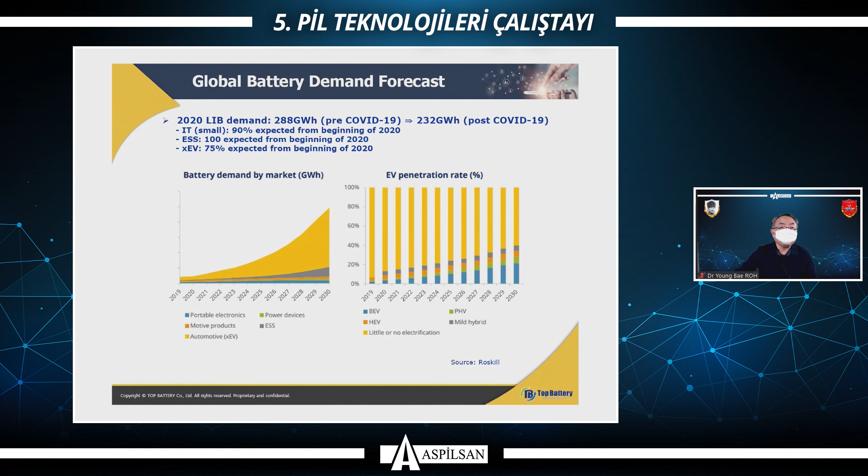The major battery players are developing high energy density batteries by using high nickel concentration cathode material. LG Chemical, Samsung SDI, SK Innovation, altogether are increasing their batteries' EV driving distance using high concentration nickel cathode material like NCM, NCA, NCMA material. So we have to keep an eye on high nickel cathode material.

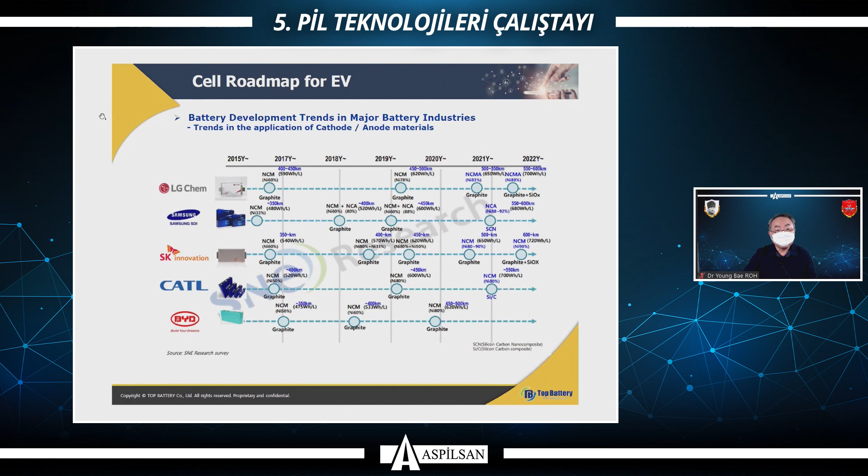Major cell makers are fiercely competing to secure high nickel cathode material by long-term contracts with CAM material suppliers due to concerns about the shortage of high nickel cathode material. But high nickel material makers say that high nickel materials have a higher technological entry barrier, and need several years for formal factory operations due to safety concerns and complicated process control.

So China companies initially focused on LFP material, highlighting the low sale price. But they are also shifting to NCM material to realize high capacity batteries.

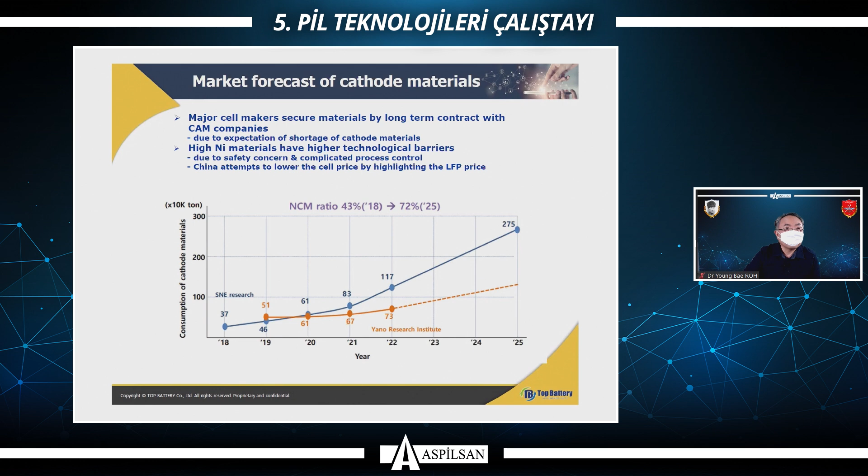As for cathode material development trends, two kinds of material will be listed in terms of cost effectiveness. One is high capacity material development, over 200 milliampere-hour per gram, including high nickel concentration over 80%, like NCM, NCA, NCMA. Another is high voltage material development with 4.7 average voltage, cobalt-free, like LNMO.

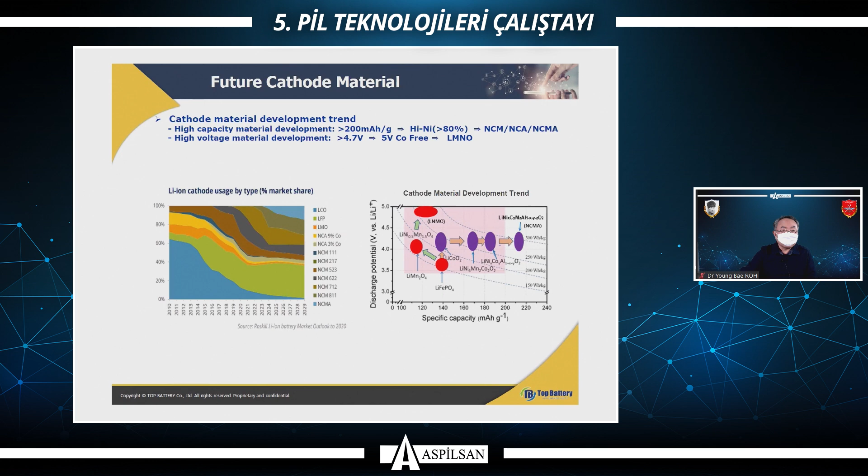From the next slide, I want to explain in more detail how to develop this kind of material. To develop future cathode material, there are several main factors like doping, facet control of crystal structure, size tailoring, and morphology control.

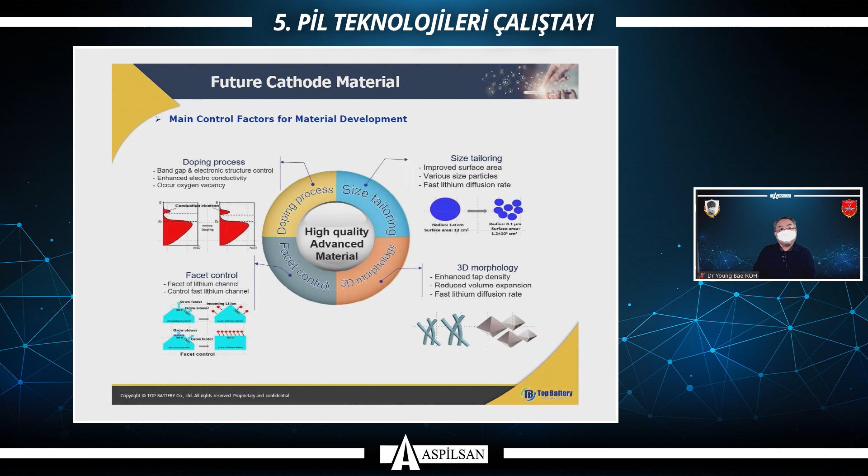There are several cathode material development strategies. Doping is one of the popular strategies to control band gap and electronic structure and improve structural stability and thermal stability. It needs enhanced ion and electron transport. Surface coating is composed of a barrier layer to protect active material from electrolyte and prevent electrolyte decomposition. It leads to stabilizing the surface reaction with the electrolyte.

Through morphology and crystal structure control, we have to select preferred particle orientations, easy to release internal crystalline strain, and optimize the crystal structure and facet control for fast lithium-ion channels. Tailoring crystal and particle size is a crucial factor to facilitate the lithium-ion diffusion rate.

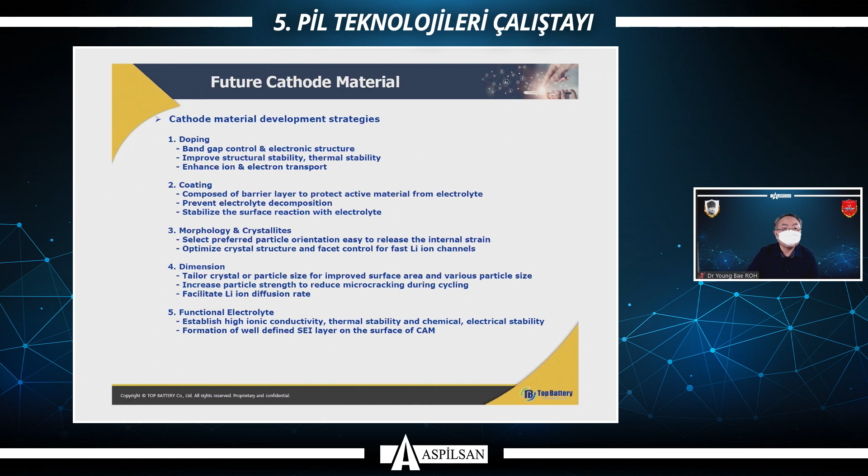These are the representative high nickel cathode materials. Polycrystalline cathode particle is composed of a secondary particle with smaller primary particles combined together. But the single crystal cathode particle only consists of a larger primary particle.

N is nickel, C is cobalt, M is manganese. 5:3:2, 6:2:2, 8:1:1 means the molar ratio. The more nickel concentration, the larger cell capacity is realized. Electrode density is like this, and the reversible capacity is like this.

In the real battery industry, volumetric capacity is more important than reversible capacity. So the single crystalline cathode material is the most promising cathode material among the high nickel cathode materials. But mass production is at an early stage. So Top Battery is now developing single crystal cathode material in-house.

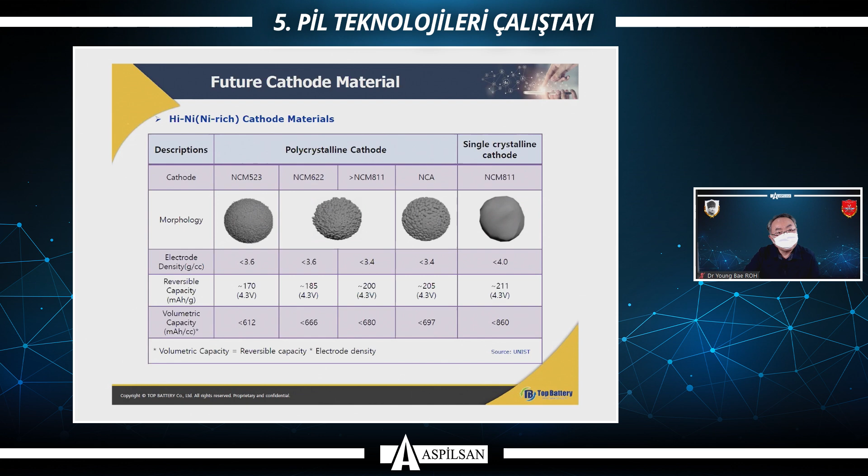This is cathode material degradation, especially high nickel cathode material. It is known to be chemomechanical degradation. During the charge state, the valence of nickel atoms in the particle surface part changes from nickel 2+ to nickel 4+. This nickel 4+ is well known to be very reactive with the electrolyte. It leads to nickel oxide impurity, the rock-salt phase.

Meanwhile, there is microcrack generation in the particle core parts, which progresses to the surface of the spherical particle. Electrolyte impregnates into the crevice of the spherical particle. It leads to NiO impurity. During the charge state, the crystal structure also changes from the layer structure to the rock-salt phase.

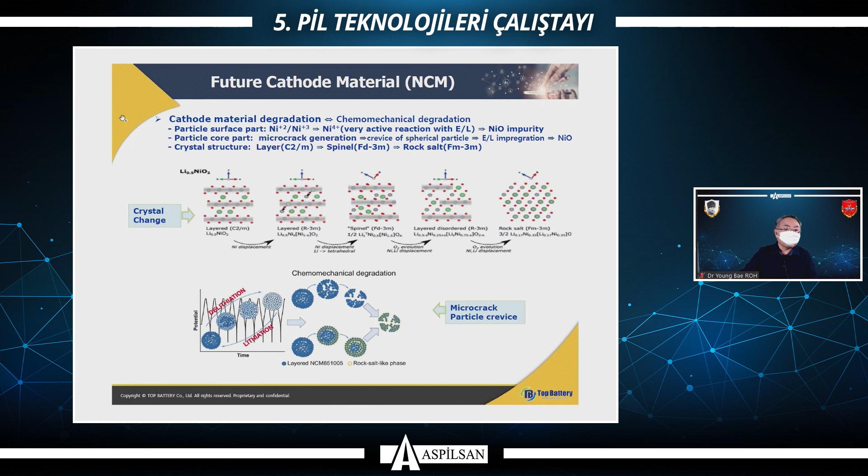So how do we improve high nickel cathode material performance? First, we can think of the doping process. As I mentioned before, titanium is good for strengthening structural stability due to the strong bonding structure with oxygen, and lowering the charge transfer resistance, which leads to enhanced cyclability.

Second, the partial crystalline structure turns out to be good for cyclability. Partial structure means the surface has lower nickel concentration, while the core is nickel-rich concentration. One material supplier in Korea is now producing this kind of material in mass production.

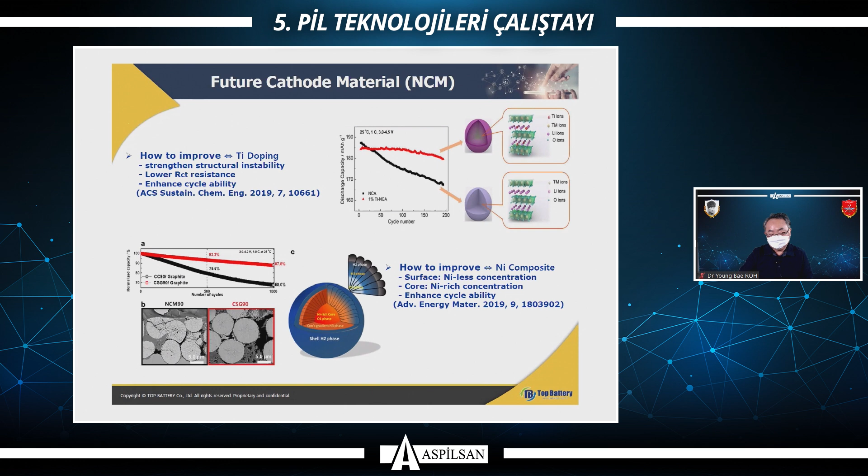The dual coating is one of the best solutions to protect the surface of high nickel cathode material from electrolyte decomposition. In this dual coating process, Li3PO4 is effective for electric conductivity enhancement. Polypyrrole protects against side reactions with electrolyte. It leads to enhanced cyclability.

The final option is morphology control. We have to select the preferred primary particle orientation as a rod shape, to release the crystal structure strain accumulated by crystalline expansion and contraction during cycling. At the same time, control of the C-axis is effective for fast ion diffusion. It leads to enhanced cyclability.

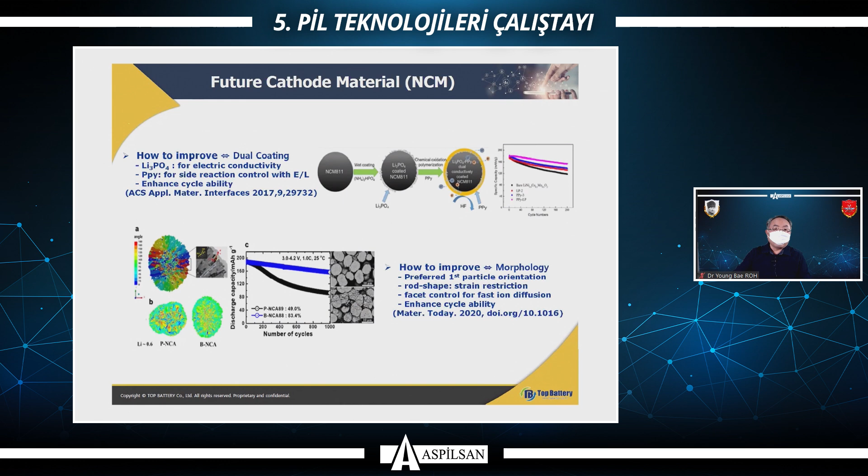From now on, I'll explain the cutting edge technology in the battery industry. Up to now, we have been thinking about the particle level to improve cycle life and high capacity. But it is important that we take our technical mind to the electrode level.

Tech-savvy engineers are always thinking about the volumetric energy density on the electrode level rather than the theoretical energy density at the particle level. The polycrystalline particle generally has a low packing density.

There is partial collapse of surface particles under high pressure, and reaction heterogeneity appears in the electrode during charging and discharging. But the single crystalline particle generally has high packing density and excellent morphology maintenance under high pressure, and reaction homogeneity appears in the electrode during charging and discharging process.

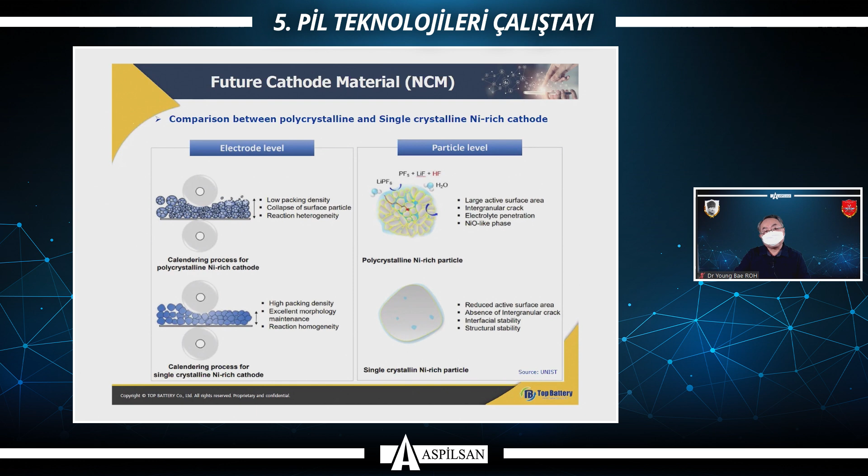I'll show you one example to directly understand what appears at the electrode level under high pressure.

The polycrystalline particles are severely collapsed at high electrode density, but the original morphology of the single crystalline particle is stably maintained under high pressure, like this.

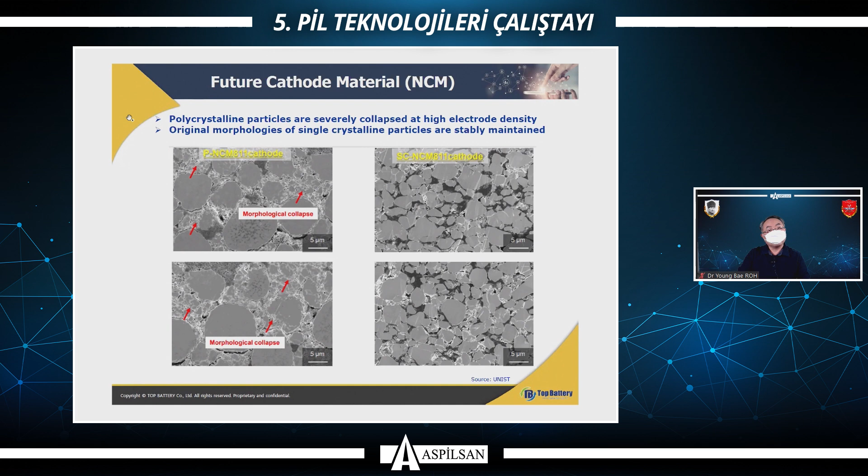So if we combine properly all of these approaches, we can develop a high-tech cathode material.

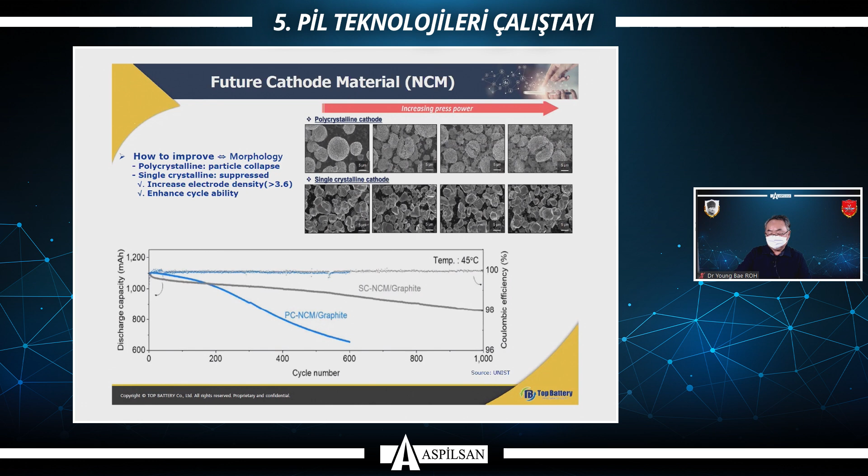One approach to increase energy density is to increase the cell voltage, because energy density is calculated by multiplying the cell voltage by the current amount.

The NCM price is expected to increase sharply due to the limited resource of cobalt. But LNMO spinel does not include cobalt.

With a small amount of nickel, like this, it has a 5 volt flat discharge potential, like this.

So the LNMO material is much cheaper than any other cathode material. So LNMO material is one of the solutions for battery makers thinking about cost effectiveness.

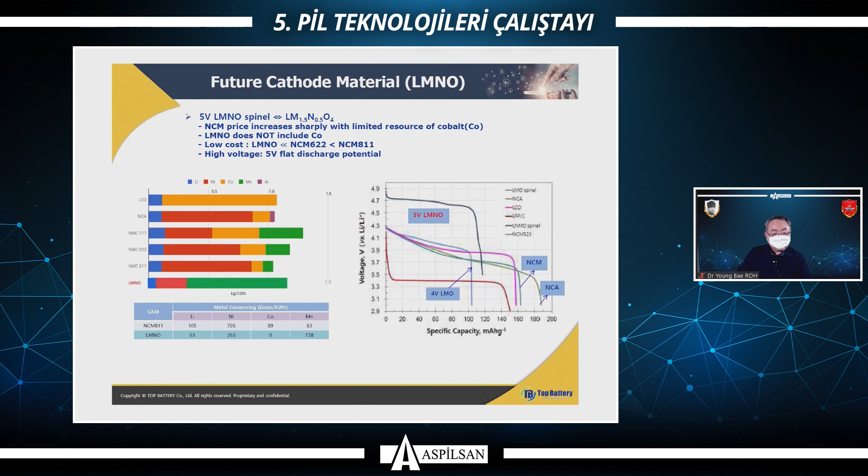The LNMO material also has high specific energy density, following by NCM811. The specific energy density is in the following order: NCM811, LNMO, 622, LFP, LMO.

So you understand how the LNMO material has a good balance between energy performance and price.

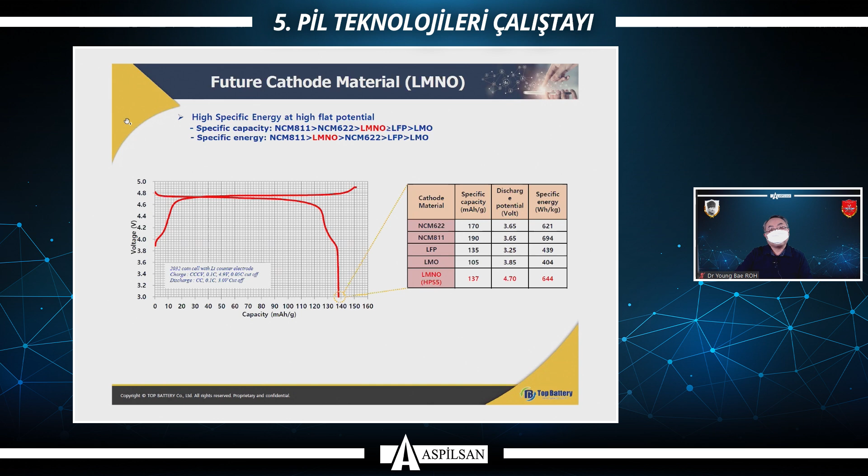LMNO material has good cycle life and high rate discharge capability. Also, LMNO material has the great advantage of using water-based binder instead of conventional NMP-based binder.

As you know, NMP is very toxic and classified as an environmental hazard. So the battery maker can benefit a lot from reducing the utility investment cost, like the NMP solvent recovery system.

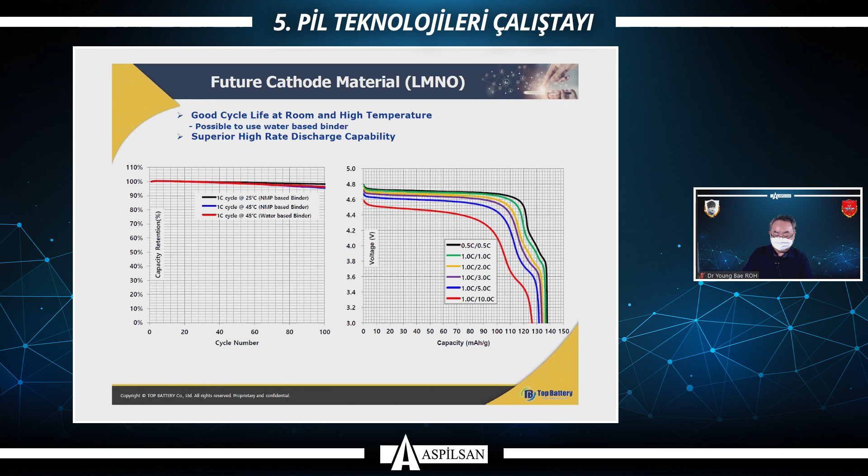We hear about EVs catching fire from time to time, and the frequency of EVs catching fire is increasing sharply these days because of the usage of high nickel cathode material.

The LMNO material has a high temperature safety characteristic. The onset temperature is in the following order: LNMO, LFP, LMO, LCO, NCM811. A peak temperature like this.

So I think the LMNO material is one of the alternatives to NCM material in the future.

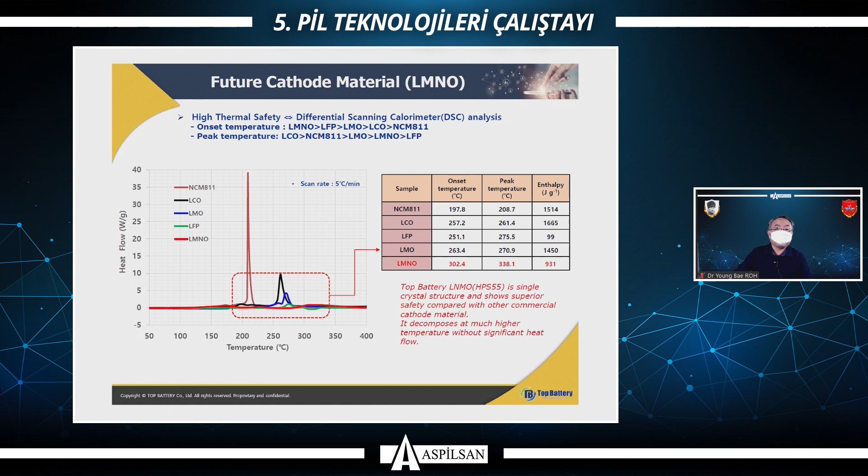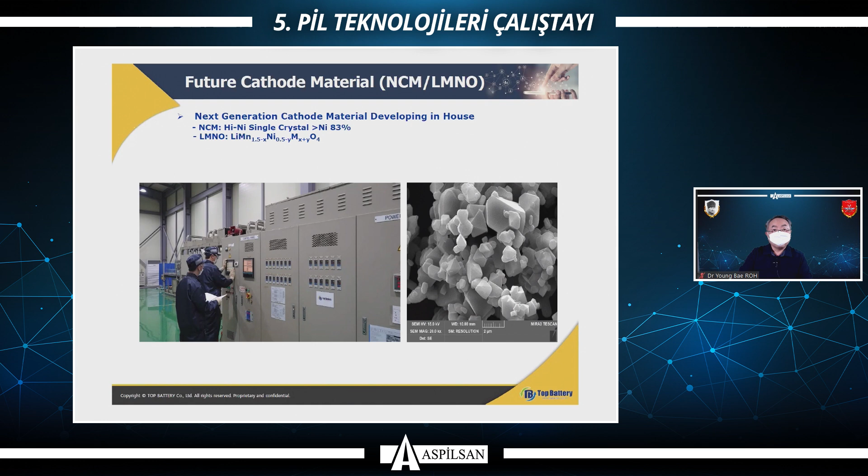We are developing next generation cathode materials like the high nickel single crystal and the LMNO material. This is our next generation material development roadmap.

We are now producing low-cost LMNO and developing high-capacity NCMA materials. The NCMA material's first target is to have a high capacity cathode with 3,000 watt-hours/kilogram. It means it's possible for an EV car to drive 500 kilometers on a single charge.

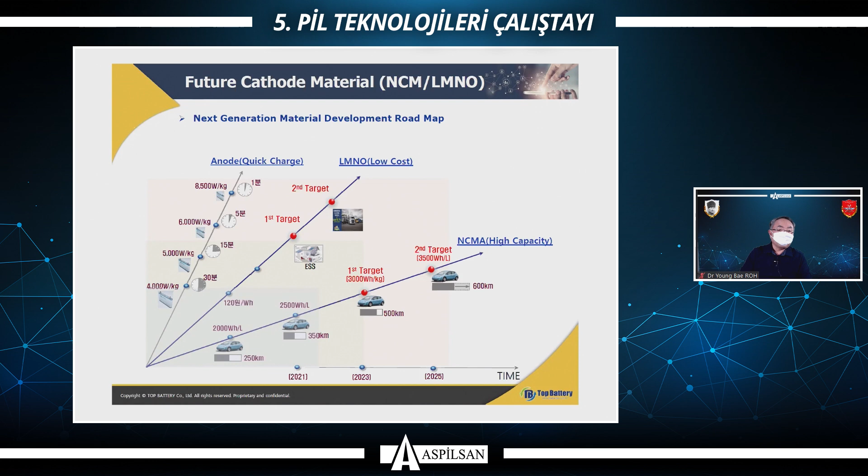From now on, I'll briefly introduce solid state battery and solid electrolyte. There are three categories to research the solid electrolyte, classified by main chemical components: sulfide solid electrolyte, oxide solid electrolyte, and organic-inorganic composite polymer electrolyte.

Each electrolyte has its own characteristics. For high conductivity, you can select the sulfide solid electrolyte. Toyota, Hitachi, Samsung, LG are researching this area.

If you want cell stability, you can choose the oxide solid electrolyte. Murata, Prologium, TDK are focusing on this area.

And if you want high productivity, you can research the organic composite solid polymer electrolyte. Hydro-Quebec, Bosch, Solid Energy are researching this area.

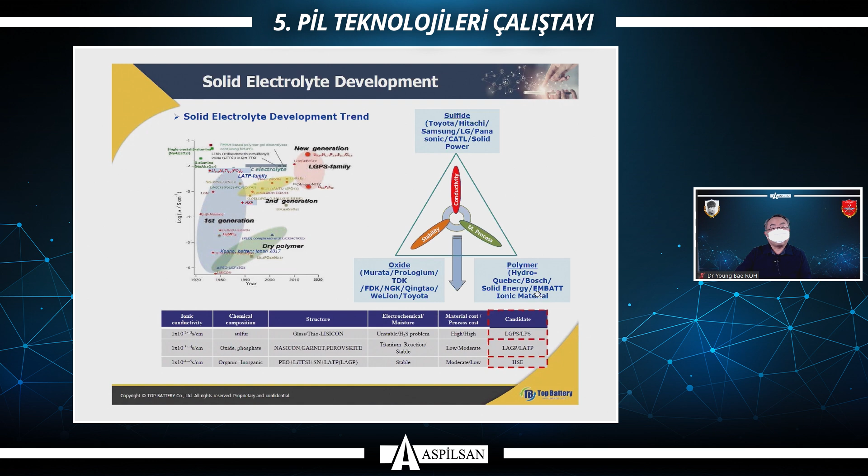This is one solid electrolyte concept. For high ionic conductivity, we have to reduce lithium-ion activation energy by securing wider diffusion paths and a more flexible frame structure in the crystal, and reducing the bonding strength between the lithium ion and anion.

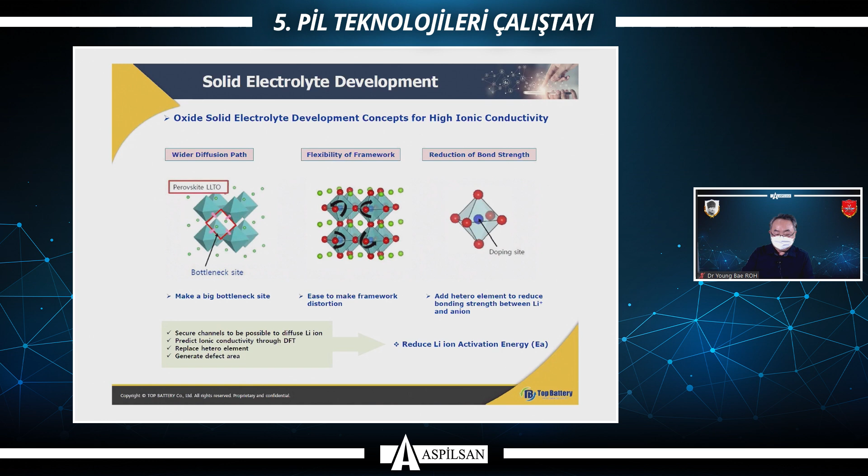Prologium is now producing all solid state battery using the oxide solid electrolyte. They are using the wet process, roll-to-roll process, to increase cell productivity. But I don't know what kind of concept is applied.

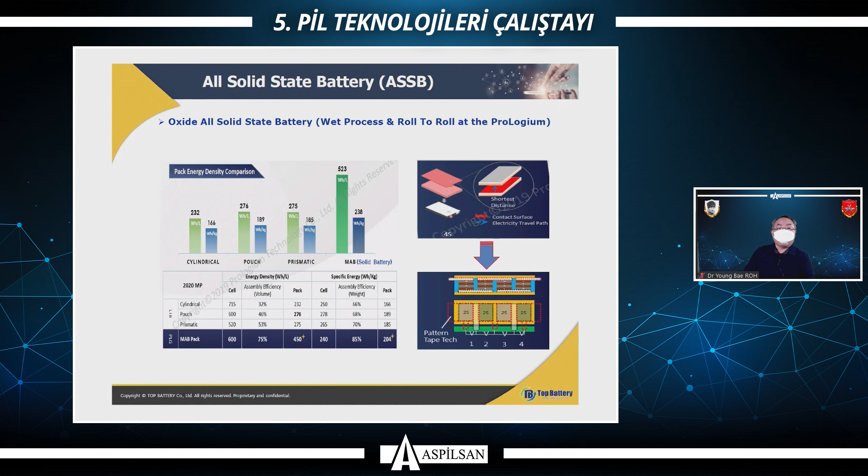This is another solid state battery production example using oxide solid electrolytes. The Japanese companies are Murata and TDK. As you know, Murata is the world's best capacitor provider in the world. They are producing this kind of all solid state battery, fully utilizing their MLCC facility, process and knowledge.

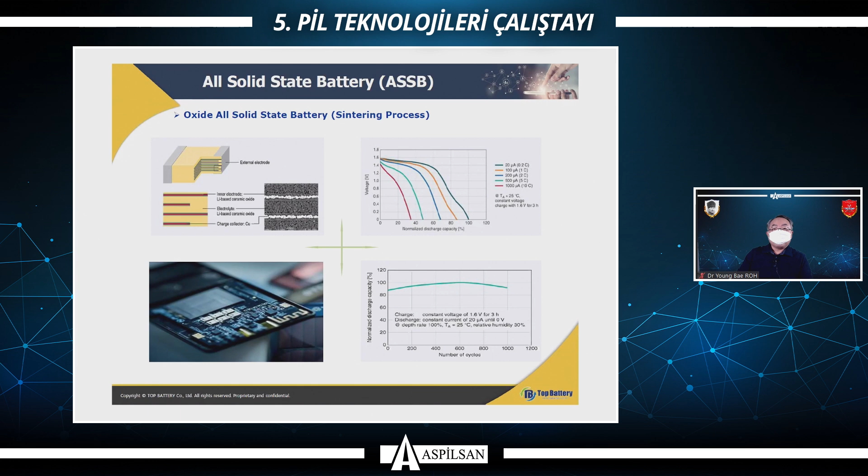This kind of all solid state battery has long cycle life and good rate performance, but limited capacity and lower average voltage compared to the conventional lithium-ion battery is the disadvantage. Okay, that's all. Today is my presentation, and thank you for your attention.